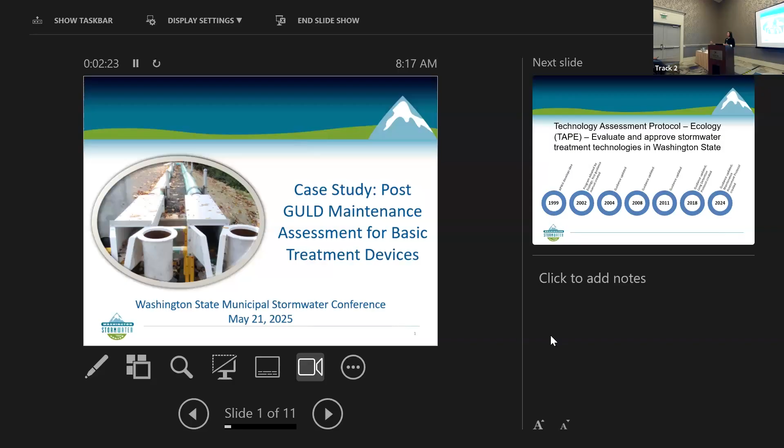Hello. So what we're going to do is Jay and I are going to be presenting together. I'm going to take the first half and talk about, first of all, how many people here are familiar with TAPE, the Washington State TAPE program? Okay, so most people. So I won't go into that too much, but TAPE added a new protocol, and I'm going to talk about the background of that, the why and the what, and Jay is going to talk about the how, because they've already done a very similar assessment.

For those not familiar, TAPE stands for the Technology Assessment Protocol - Ecology, and it's Washington State's way of evaluating and approving stormwater treatment technologies to be used on municipal projects to meet municipal permit requirements. It was first thought about in 1999, and has been around officially since 2002, with updates along the way, including our most recent update, completed last fall in November 2024.

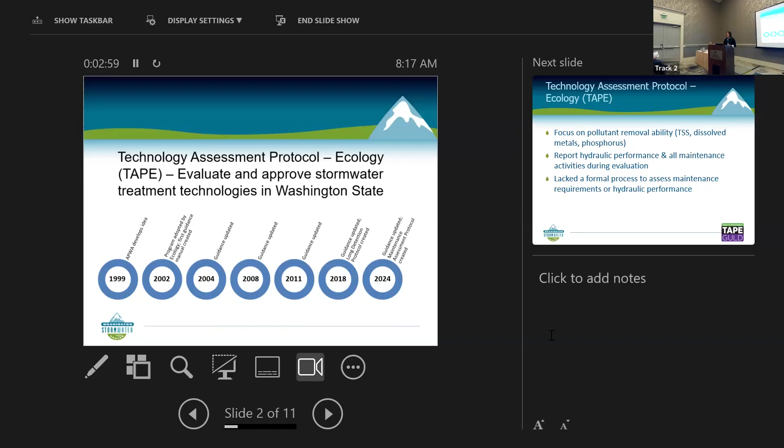Throughout the years since 2002, the main focus of TAPE has been on pollutant removal ability, specifically TSS, which is what we call basic treatment, and then looking at dissolved metals, dissolved zinc and copper, and total phosphorus. The folks doing their assessment have to do testing in the field, and during testing they have to report hydraulic performance and all maintenance activities that occurred during their evaluation. But TAPE never had a formal process to assess maintenance requirements or hydraulic performance, and we also didn't have any requirements for how long of a maintenance cycle they needed to meet, since it can vary so greatly between site and land use.

So we would get the data they submitted to us, but we didn't have a formal way of assessing it, and we didn't have any criteria.

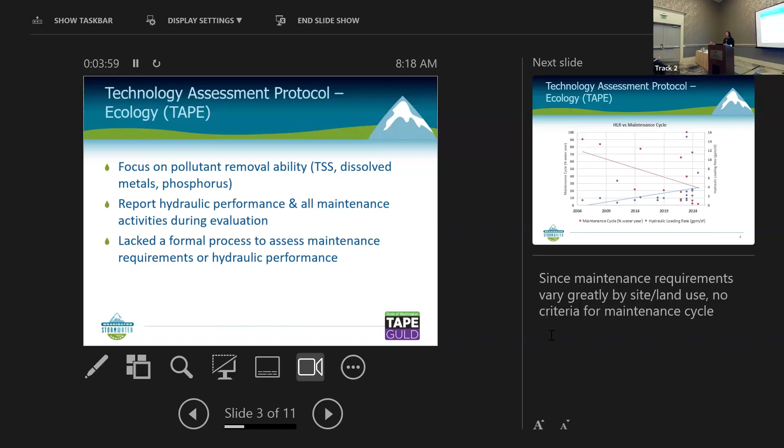What we started seeing happening over the years was folks coming in - this orange line is the maintenance cycle we would see over the years, based on a percent water year, starting back in 2004, all the way up to the most recent approvals in 2025. The blue line is the hydraulic loading rate, the gallons per minute per square foot these systems were approved at. That's generally how TAPE approves systems - they say this system is approved at 1 gallon per minute per square foot, and then they figure out how big they need to build it to accommodate all the flow coming into that site from their drainage area.

Over the years, we would see an increase in the request for a hydraulic loading rate. The manufacturers or companies coming through the program looking for approval were looking for higher and higher hydraulic loading rates, because that means they could build smaller and smaller systems, which would be great in some instances, because in urban areas we'd like to have smaller systems.

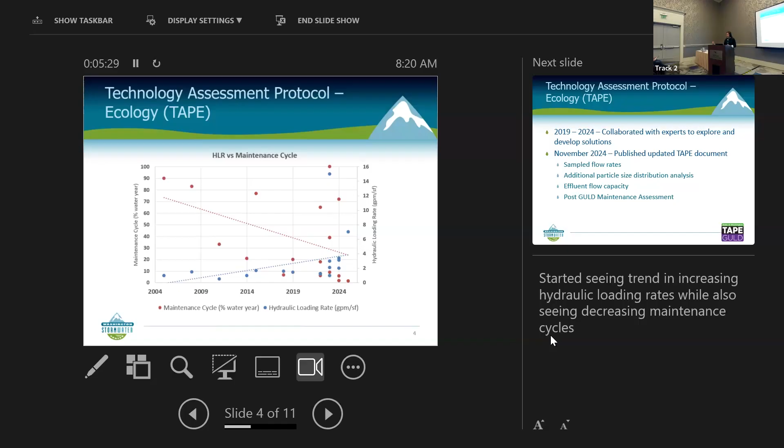But often we would see a decrease in the maintenance cycles. Some of these higher hydraulic loading rates that were requested, we didn't always approve at what they were requesting - we cut some of those back based on the data we received. But we were still seeing a trend of decreasing maintenance cycle and increasing hydraulic loading rates. So we started thinking about how we could go about managing that.

So in 2019, we collaborated with our stakeholders advisory group, made up of municipalities in Washington State and the City of Portland, to figure out how we could address this.

We expanded that to work with our board of external reviewers, made up of stormwater professionals from around the country. We also engaged with the Stormwater Equipment Manufacturers Association to develop solutions and ideas for how we could update the protocol to address that.

And we finished our protocol update in November of 2024. So that's what I'm really going to focus on here.

Most of those updates focus on ways to better confirm the hydraulic capacity and the maintenance requirements of approved devices. We updated requirements related to sampled flow rates, particle size distribution analysis, effluent flow capacity, and the one we're really going to focus on today is we added something called the post-GULD maintenance assessment.

A GULD, for those who don't know, is their general use level designation. That is the certification given to a technology once it's approved and can be installed in Washington State on municipal projects.

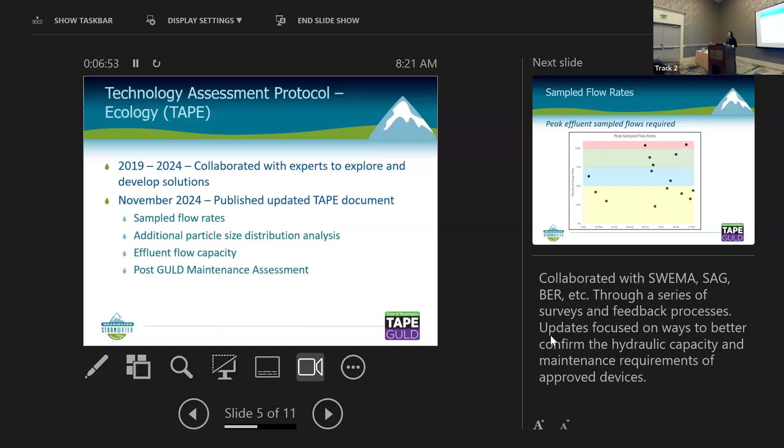So just going over the other updates quickly - sampled flow rates. Over the years, we were seeing some systems that would have a couple of samples at the high flow rates, their design flow, but the majority of samples would be at 20% of their design flow, and we really didn't know how well these systems worked when they were being stressed at their higher flow rates. So we added a requirement for a greater distribution of sampled flow rates for their evaluation.

Now we are requiring that they collect 15 samples throughout their evaluation: 2 of those have to be collected at or above 100% of their design flow, 3 between 75 and 100%, 3 between 50 and 75%, and the remaining 7 can be collected anywhere in that range. But we really want to see how it works along all of the design flow rates.

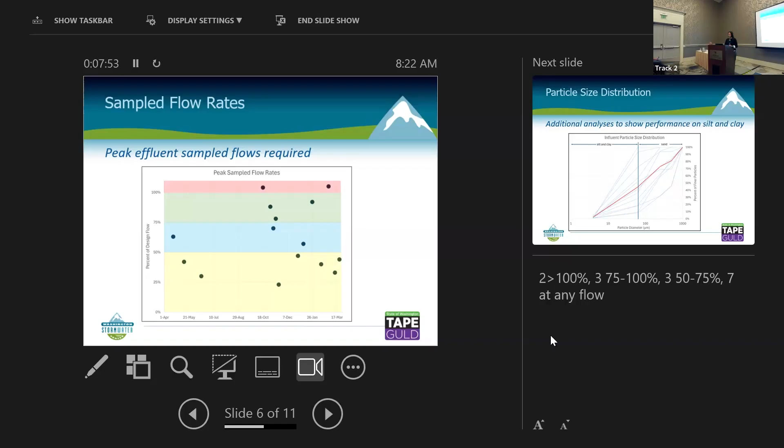TAPE has required since the very beginning for people doing the evaluation to test the influent particle size distribution. We know that finer particles are harder to treat, and Ecology has said that the typical particle size in Washington State has an average D50 of 62.5 microns, which is pretty fine.

That means on average, the majority of particles in stormwater are expected to be less than 62.5 microns. So for testing systems for approval, we want to test them with stormwater with similar particle sizes, because if it has a lot of larger particles, it's likely going to do better, and we don't know how it will perform when installed in a more typical system with these finer particles.

So we added some additional requirements for testing not only influent, but effluent particle size distribution. And if those particle sizes are not within what Ecology calls the Washington State range, then they have to do an additional statistical analysis looking at how it performs on those finer particles.

So we require them to look at different bin sizes and then look at the treatment on those finer particles. We have not implemented this at all yet - well, I shouldn't say that, there have been manufacturers who have done this willingly in the past. We have not implemented this as a requirement yet, so we're still finalizing what that is exactly going to look like, but we're hoping it'll give us some better data

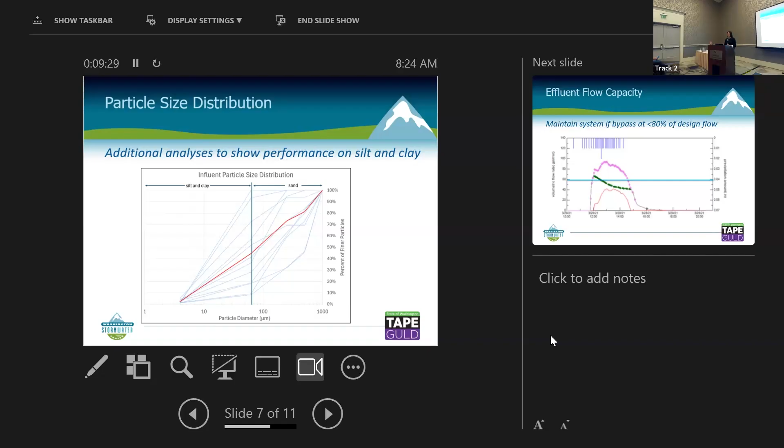We're also requiring that systems be maintained if they bypass at less than 80% of the design flow. We were seeing a lot of evaluations where systems would bypass at these lower flow rates and wouldn't be maintained, so it didn't give us a true sense of what their maintenance cycle was. We might get information on when the maintenance was done, but not when it was needed. By requiring them to do the maintenance at a set point, it should give us a better idea of what the actual maintenance cycle was during their tape testing.

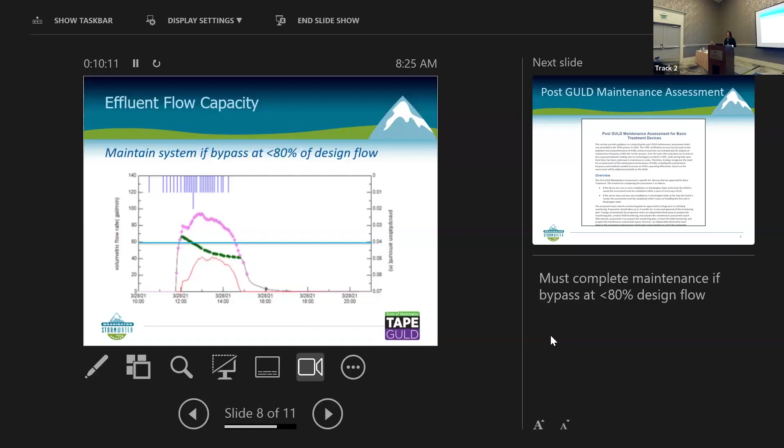Again, this is just during their tape evaluation. Finally, we added the post-GULD maintenance assessment, and this is actually included in the tape guidance document. So if you go to the tape guidance document on the Ecology website, it is at the very end - after all the information about how the proponents or manufacturers needed to produce their final report. At the end, it talks about the protocol requirements for doing this post-GULD maintenance assessment.

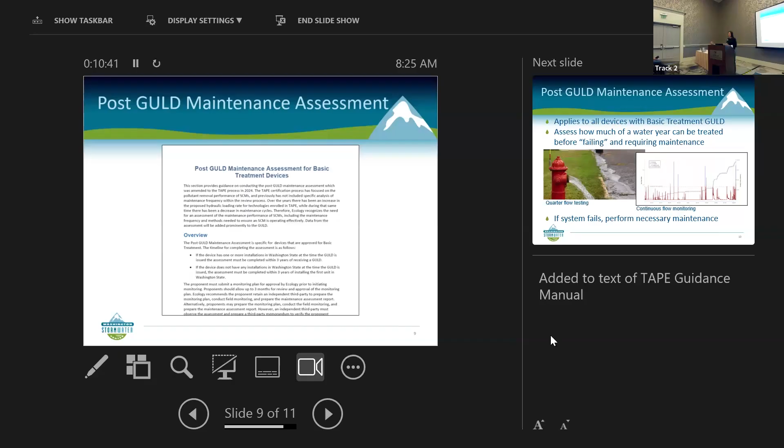This applies to all devices with a basic treatment general use level designation - any device that has been approved for removal of TSS, which we call basic because that is the bare minimum requirement for being installed for most municipal projects. They can add dissolved metals and total phosphorus on top of that, but at a minimum, they have to show they can treat for TSS and meet this basic treatment GULD.

It was originally thought that we would only require this on new devices getting a GULD in the future, but Ecology has decided we are going to require it retroactively. So anybody with a current general use level designation will also have to do this testing.

For the new technologies, they will have to do this assessment at 3 different sites. One has to be in the Pacific Northwest. The other 2 can be anywhere around the country.

For people who already have their GULD, whether or not they have to do one, we decided if within their tape testing they were able to meet a minimum of 30% of a water year and not need maintenance, they only need to do 1 more evaluation. If they did not meet 30% of a water year during their tape testing, they then have to do 3 sites. It's about a 50-50 split with our current GULDs, whether they have to do 1 or 3 tests.

The basic premise of the test is you have to assess how much of a water year you can treat before failing, and failing means bypassing at 95% of the design flow. So essentially we want a system to go out and install, either install a new system, or if you have a system already in the ground, clean it, make sure it's maintained and clean, and then let it be online and let water flow through it for a full water year.

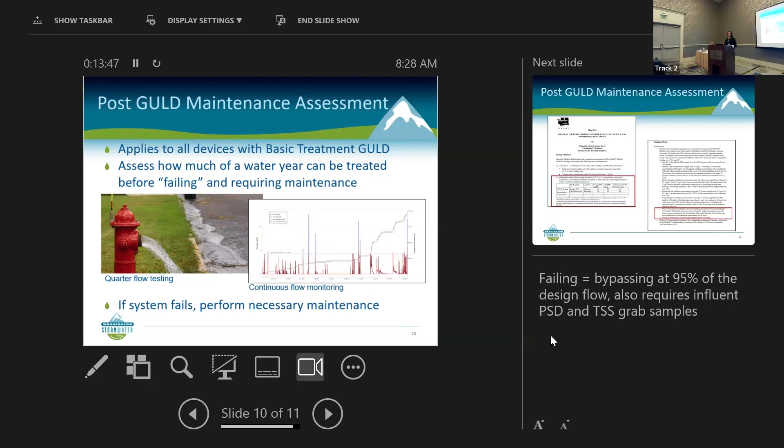Once they're done with their tests, if the system fails, we want them to perform the necessary maintenance to bring the system back up to be able to treat at their design flow.

The reason for this is we want to be able to add all this to the general use level designation. This is actually the general use level designation for the BioPod that Jay will be talking about here. It's kind of hard to read, but front and center in the document we have added a table that outlines when the testing was done, where the testing was done for their general use level designation testing for tape, and then when the maintenance assessment testing was done, and what percent of a water year they were able to treat.

Further on in the findings of fact section of the document, we include the information about what maintenance was needed. We're hoping this will allow municipalities to have a better idea of how frequently the maintenance would need to be done, and also what kind of maintenance was needed, whether it was simply scraping and replacing the mulch, or replacing the entire media, so that municipalities can have a better idea of the maintenance requirements of these systems.

And so I'm going to hand it over to Jay, and he's going to talk about the intricacies of doing the quarterly flow testing that they did for the BioPod.

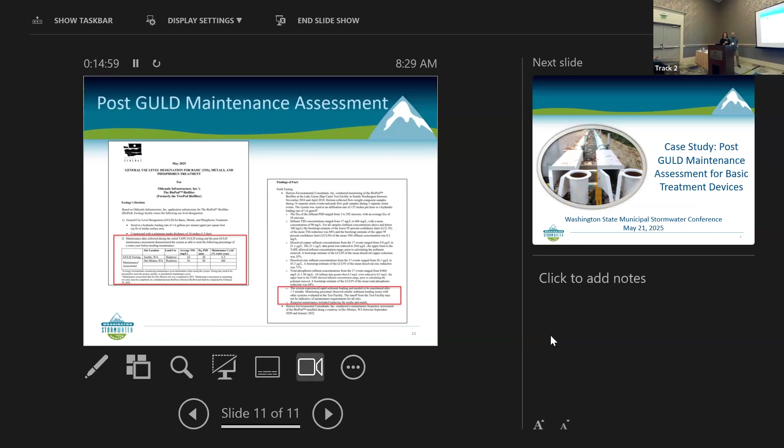Great. Thank you, Carla. And I'm going to switch over to... Oh, good. Thank you.

We were the guinea pigs with the BioPod, and in the GULD it said that we needed to test it at a more typical site in Western Washington to see how long it lasted. There was no process for doing this, so we worked with Dylan Ahern, here in the audience today, and his team at Herrera developed a proposal for Ecology, this quarterly testing, to determine how long the BioPod lasts in a more typical situation.

So what I want to do today is talk about the BioPod biofilter so you know what it is, talk about our GULD approval and that stipulation, and then focus mostly on the hydraulic testing that occurred.

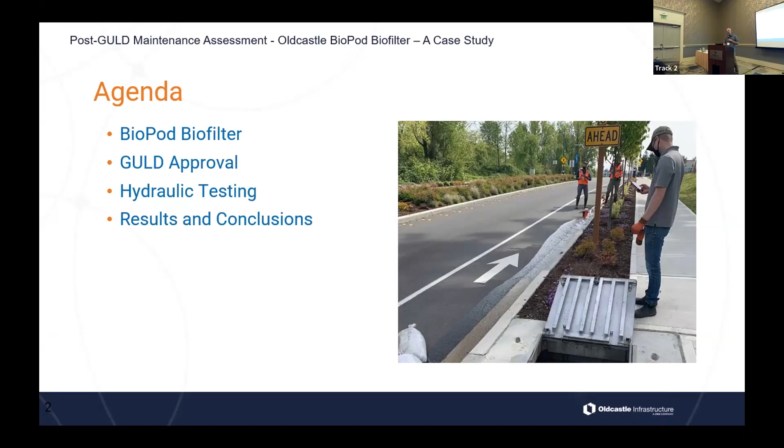And then show the results. So here's the BioPod biofilter. As I mentioned, it has full GULD approval for basic, enhanced, and phosphorus treatment. It's a horizontal bed filter, so the flow comes in on top of the media bed and goes down vertically through the media bed for treatment and then discharge.

And it comes as a complete system. It is a high flow biofiltration media, so a smaller footprint is allowed, or it allows for a smaller footprint for ultra-urban applications. Vegetation in this system is optional.

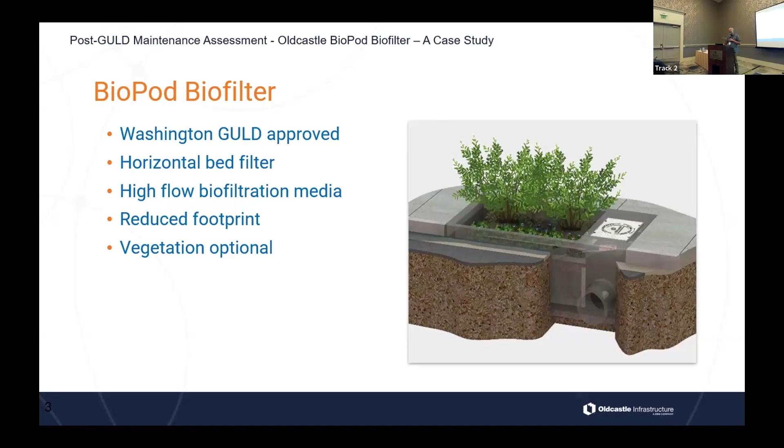I'm showing the planter box style BioPod here. It's also available with a tree, and since we tested it without vegetation, it performs without vegetation as well as with vegetation. We're also allowed to eliminate the vegetation, put a door over it. You can also pipe flow into it with a deeper system.

So that's the system, and our GULD approval outlined our treatment rate, which is 1.6 gallons per minute per square foot. You take your water quality flow rate, divide by that 1.6 gallons per minute per square foot, and that gives you the number of square feet you need. You select your system. The target maintenance for this system is 1 year, but as we all know, maintenance requirements are site specific because it depends on actual loading.

You want to inspect your system - that's kind of the bottom line here - inspect your system and do maintenance when it's required for each site, and be prepared to do that. But testing like we did here can show what you can have in the way of expectations.

So we did propose and perform the hydraulic testing that is largely the same as what Carla described as far as the updates in the tape are concerned.

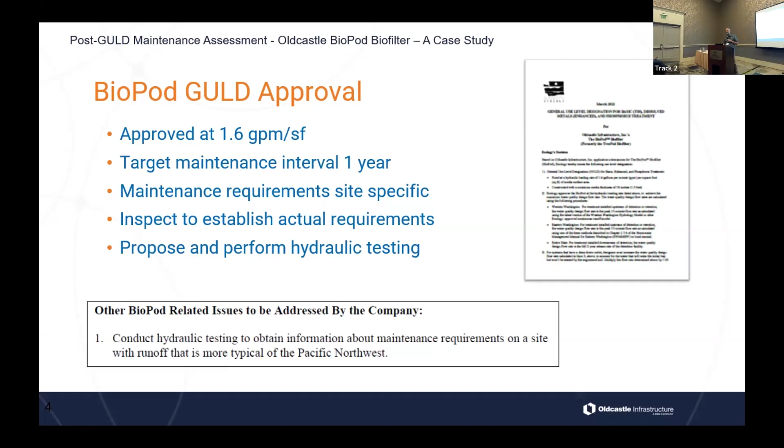So first we identified a test site. We found a 4x6 BioPod that was a surface unit, so basically it had a door on it. It had no vegetation, but it had a curb inlet, and it is in Des Moines, Washington. The design treatment rate for that particular system, still out there operating today, is 33.4 GPM. It has a curb inlet, internal bypass. It's a roadway application, as you can see there in the photo. It had a pretty well-defined drainage area, and it was recently constructed.

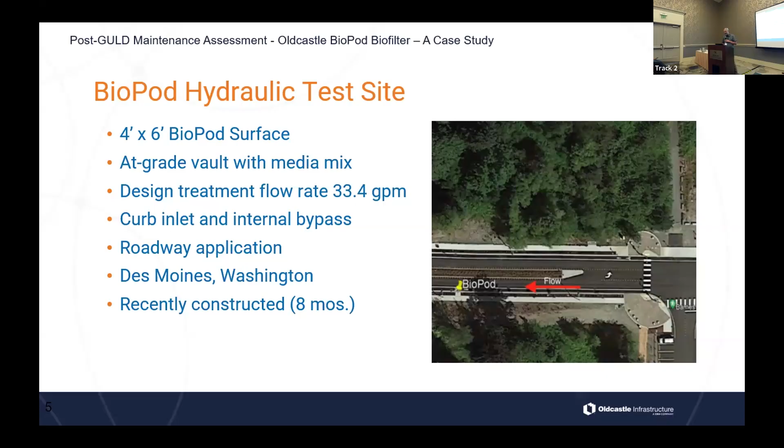It had been in the field for about 8 months in operation. So the hydraulic test plan that Herrera proposed and was accepted was to determine the peak capacity of the system quarterly. There was also periodic influent sampling that we needed to take to show that we were getting actual loadings - 10 grab samples for the influent, then look at the TSS concentration from those grab samples. We also had to look at the TSS particle size distribution.

That also involved paired effluent sampling for 5 grab samples of effluent sampling. Actually, I screwed up my headings on this.

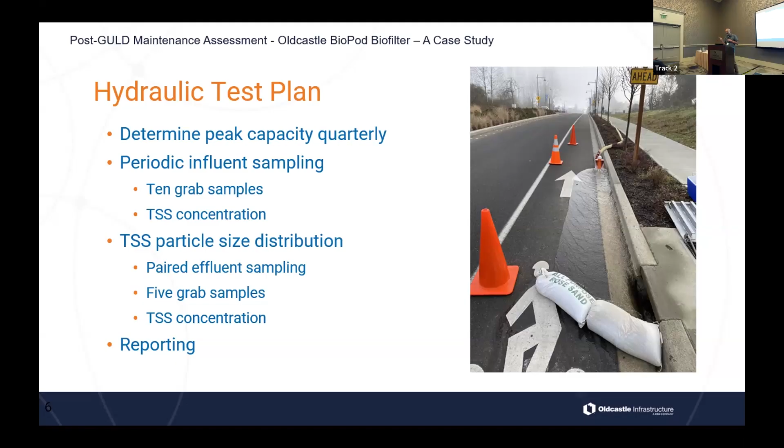I apologize, because we had to do TSS particle size distribution for the influent, and 10 influent grab samples where we looked at concentration and particle size distribution. And then 5 of those influent samples had paired effluent samples where we looked at concentration. So I got that, and then we had to report all that, of course.

So here's the hydraulic test equipment. We needed a fully maintained system, so it was like on day 1, plus 3 minutes. We had to have a water truck to supply water since there was no hydrant available, hoses to get the water where we needed it, a flow meter so we know what the flow is coming into the system. We needed a diffuser and a dechlorinator because we didn't want chlorinated water going into the storm sewer system, the receiving waters. And we needed safety equipment, cones, personal safety equipment, etc.

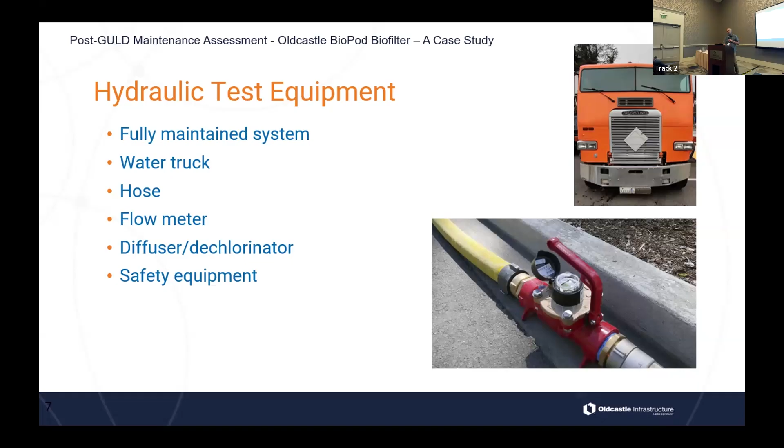So the hydraulic test sequence was to prepare the system for observation. We wanted to go out there, open the lid, take a look around, fill the system to saturate the media, let the water sit in the system for 10 minutes or so, and then increase the flow to the point of bypass, right up to the internal bypass weir.

We put the water surface elevation, and then we had to stabilize the flow. That was a bit of a trick because we had a radio, and you'd radio back to the guy in the truck who has a valve, and he's turning it up and down trying to stabilize it right at that bypass point. So we have the maximum amount of head, which is where you'd need to get your water quality flow rate treated, and a little bit more flow is allowed to go into bypass. So we stabilized it right there at the weir crest.

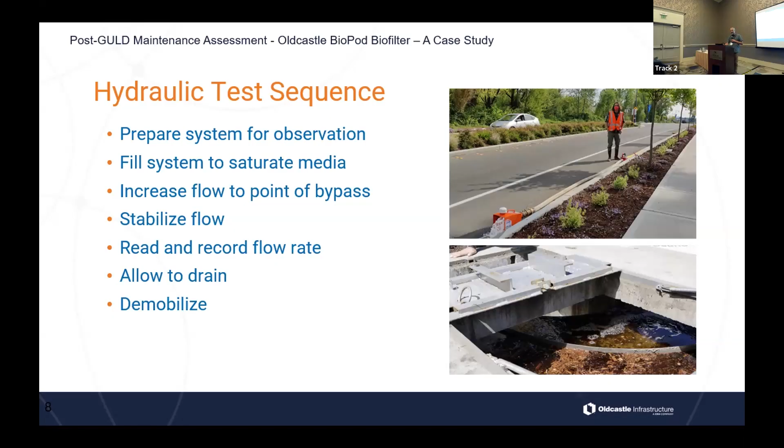And then we read and recorded the flow rate from the flow meter. That showed us whether or not we were meeting the peak hydraulic requirement for that system, which was 33.4 GPM. We just read and record the flow rate at that point and allow the system to drain and then demobilize. So it was pretty simple and straightforward.

Here's the hydraulic test timeline. In late September 2020, we maintained the system so we had a fresh system to work with. Then we went out and did our initial hydraulic test in October. The first quarter was in January, our first active event at the end of the first quarter. Then we had a second quarter in April, third quarter in July, and the final quarter again in October. In the middle there, you'll see there was a road sanding event.

We had a big snowstorm, 9 inches of snow in Des Moines on February 14th, 2021. They went out and sanded the road and never picked up the sand. So all of that grit and the associated fines got into the system, and we went out there and looked at it, and it was just hammered.

We waffled back and forth on whether to start over or see how it goes. So we ran out and did an intermediate test to see how things were going, and it was still meeting its water quality flow rate. So it was like, well, let's just leave it and keep going. And that's what we did.

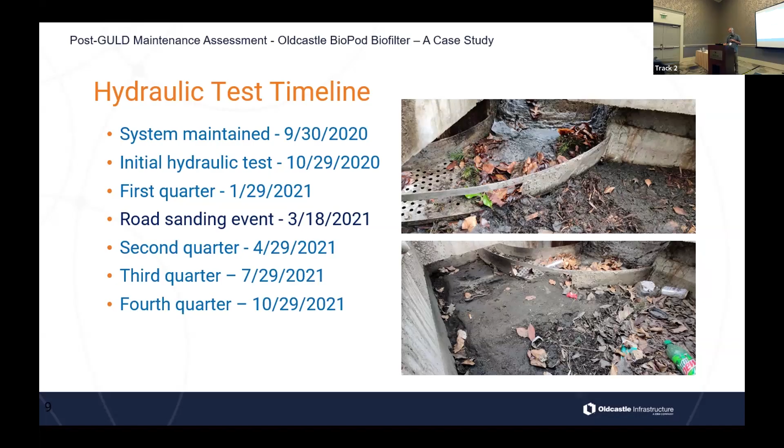But when the test ended, we decided to do some supplemental testing as well. So we did a 5th quarter and a 6th quarter. In the 6th quarter, we tested it before we maintained the system. Then we did a maintenance where we removed the mulch and 3 inches of media because it was holding a lot of sediment in the mulch and that first 3 inches of media. We got it down to where it was relatively clean, replaced that, ran the test again, and showed that maintenance allowed the system to recover full capacity.

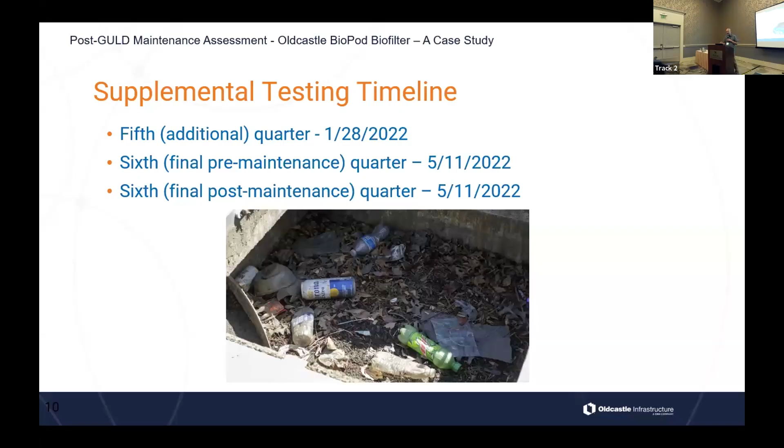Again, you're taking grab samples, so they're snapshots. We had a lot going on at the site that wasn't captured, but in some of those pictures you can see how heavily that system was loaded. The particle size distribution was low - the D50 was 40 to 60 microns, which was right in line with the 62.5. Okay, I'll wrap it up here pretty quick.

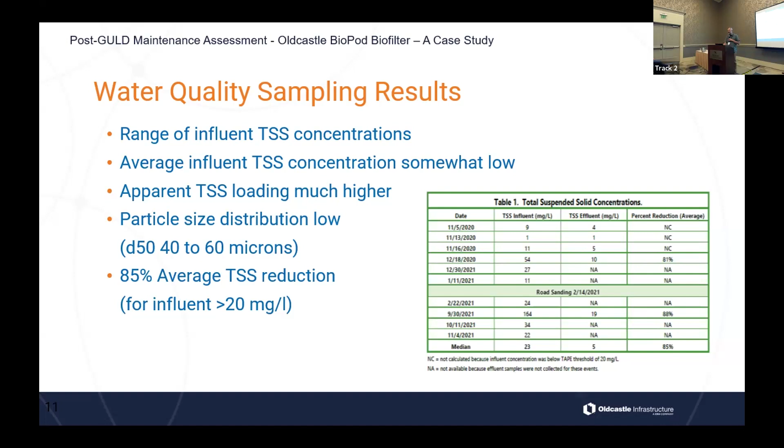And where we did have influent and effluent paired samples, we had an 85% average TSS removal rate. So that was good to see the system was performing up to snuff.

I'm going to skip the table and go straight to the graph because it's easier to comprehend. You can see the design flow rate here in the green line. Most of our points are over that. The last one, from the fourth quarter, is below.

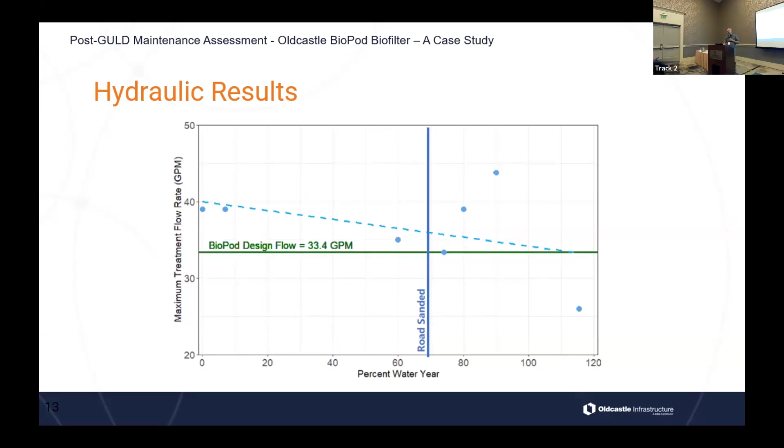The dotted blue line is the statistical linear regression, which shows we got 115% of the water year at that particular site. That was the end of the fourth quarter. Those two extra quarters took us through the fall and into the winter.

As it turns out, that last point we took was at 80% of our design flow, which is where you need to maintain the system according to Ecology. And we had treated 207% of a water year because we had a very wet two quarters there.

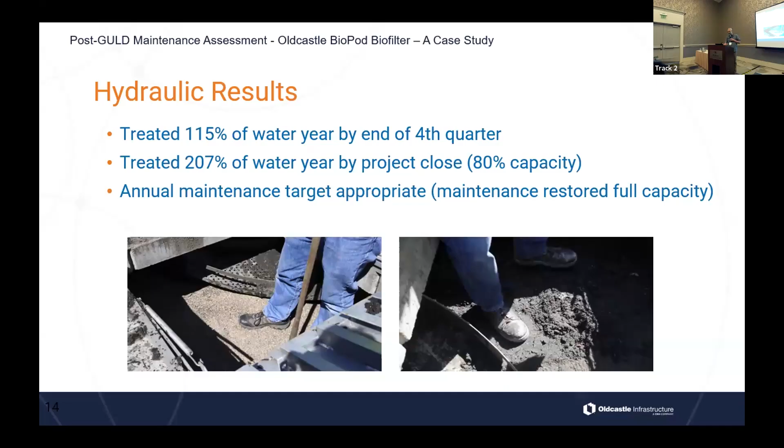So the bottom line is that an annual maintenance target is appropriate. The conclusions we had after this were that the test is reasonable to execute. It's pretty simple and straightforward compared to performance testing, and it has a reasonable execution cost.

The loading conditions can be very variable, though. The numbers that come to you at the end aren't perfectly representative. They don't clearly show any ramifications, good or bad, from that sanding event we experienced. So it shows you really have to dig into it to find out what the intricacies are.

A head-to-head comparison of systems will be difficult to make because every site is different. So the bottom line is that the actual maintenance cycle for any of these systems will remain site-specific. But I think the testing that Ecology and the Washington Stormwater Center have introduced will go a long way toward giving people confidence in these systems, and will help determine target maintenance cycles, and then you can look at each system individually after that.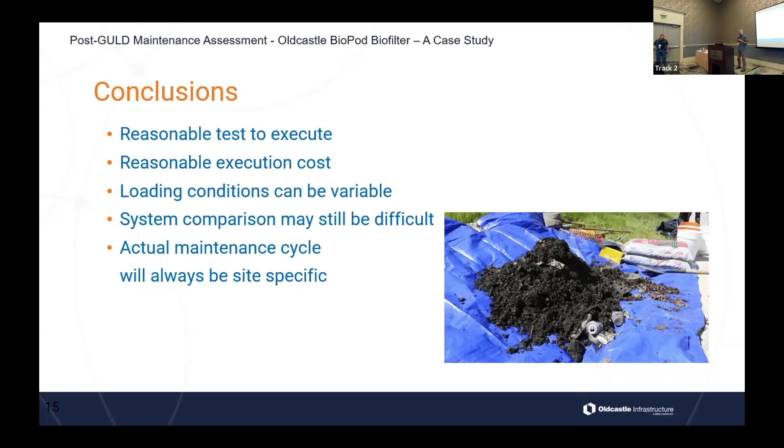So the question is whether or not these are being maintained at the frequency that we see during testing. No, I would say no. There are requirements within the permit of how frequently they need to be maintained, and my guess is that municipalities don't have the ability to maintain them more frequently than required.

So that's one reason why we're trying to. We also have, within the table showing what kind of results they saw during maintenance testing, a footnote that says we highly recommend you take this into account when sizing your system. So maybe if a system needs to be maintained every three months, you'd want to increase the size to get to your annual maintenance cycle.

I understand it costs a lot more to install a larger system, but in the end it might be less expensive than having to maintain it more frequently. So whether or not they're being maintained at the frequency required during at least some of the initial performance testing, I doubt it.

I do want to say a lot of the systems with frequent maintenance requirements during performance testing were tested under the I-5 bridge. We don't know exactly what's going on with the water there, but it seems to gunk up the systems much more quickly than otherwise. It's great because it has all the pollutants in it and they're able to show performance, but it gunks up the systems pretty quickly.